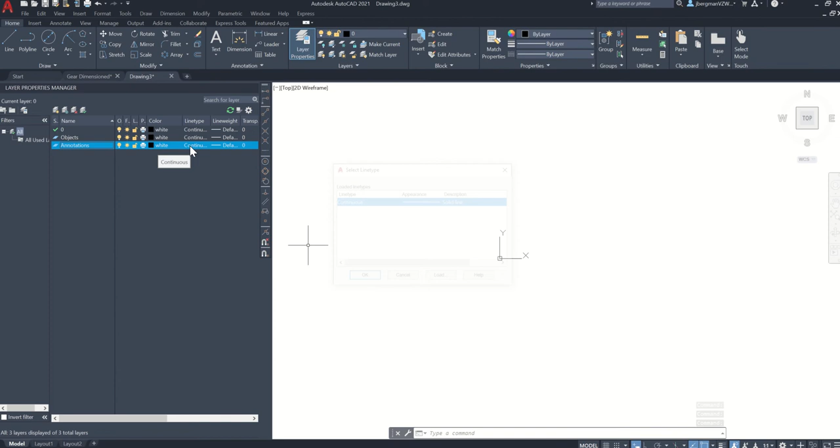And for this layer, we're going to change our line type. So click continuous under line type. And when you add a new layer, or a new line type in your layer, you have to click load. Then we're going to scroll down and find center. Click OK. Then click center and click OK. Now this is your center line type. If it's not showing up in here as center and it says continuous, just click it again and make sure center is selected and click OK.

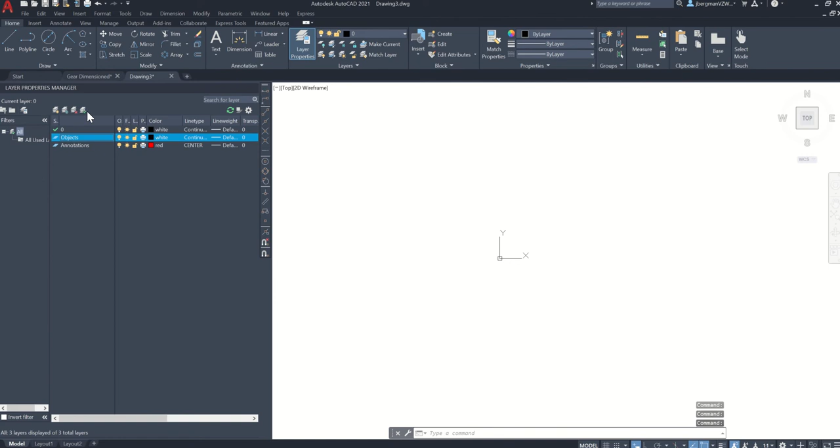All right, and then for our annotations layer, we're going to change this to a red color. And then we're going to click the objects layer and click check to make it our current layer. And then we can exit out of our layer properties.

All right, let me just make sure my units are the right precision. Okay, so another way to change your layer, you can just click this drop down and click objects.

And it's important to note, so I have this Defpoints layer because I have these dimensions in here, and when you create your first dimension, this Defpoints layer will show up. On your drawing, you're not going to have the Defpoints layer because you're not going to add dimensions yet, and that's okay. So you should just have layer 0, which is the default layer. You can't delete that layer. You're going to have annotations, and then you're going to have objects layer.

I'm going to select objects to make it my current layer. So the first thing I'm going to do is draw the outside of this part right here, or this gear right here.

So what I'm going to do is click this drop down and change it to annotations layer, and I'm going to click line. My first point is going to be 0,0, enter. And then I'm just going to draw a line. The length doesn't matter right now, just I'm going to make mine 5 and then tab, and this is going to be 30 degrees. Escape. So I want this to be a solid line here, not the center line type.

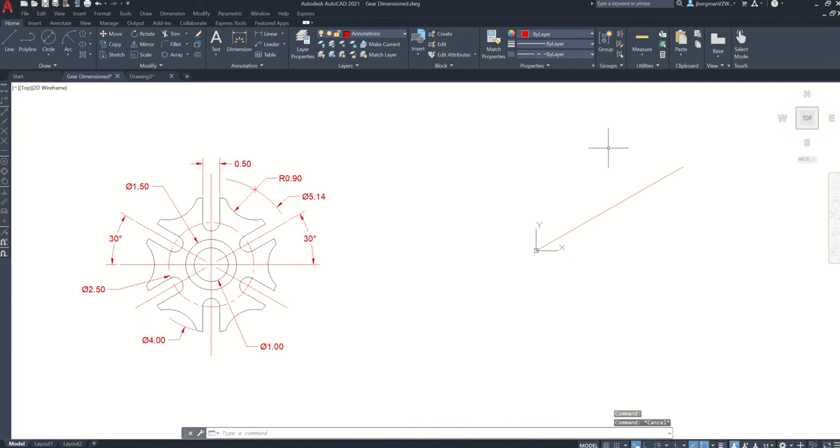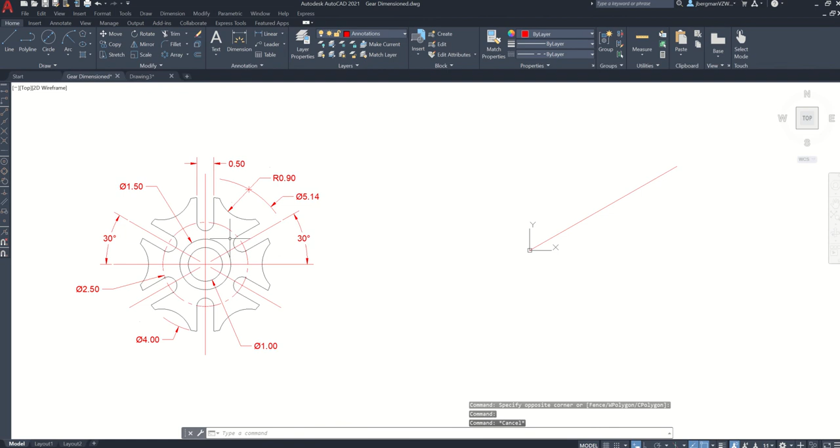And then I am going to, let's see here, start drawing this portion right here. So you can see that this circle right here and this line, okay let's see here, I'm going to draw this circle because you can see that it is the center point of this arc right there. So I'm going to end up drawing this arc first using this circle and this line.

So I'm going to do the center diameter circle. You can see that the diameter is 2.5 over here. Start in the center and then 2.5, enter. Okay, and now from here we can see the center point of this arc.

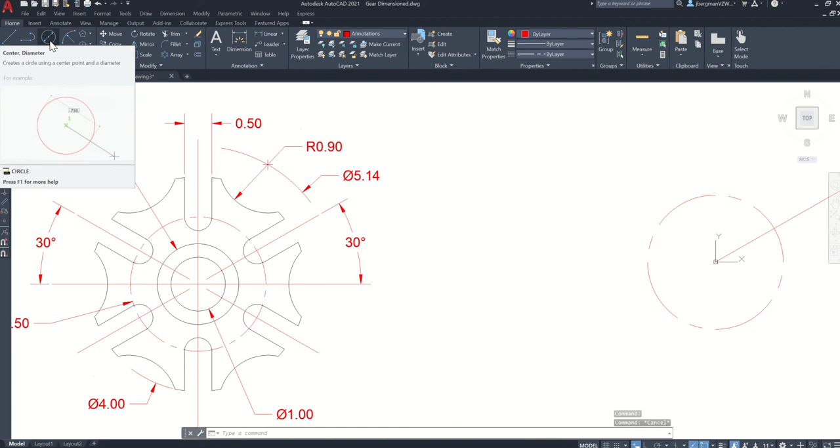Now we know the center point of this arc, but we need to know the radius or diameter. We can see that the diameter of the circle is 0.5. So we're going to use the center diameter command, click that point right there, and type in 0.5, enter.

I'm going to click on this object and change the layer to the objects layer, then hit escape to deselect. This one will still remain on the annotations layer, so just click this and change it to the objects layer, so everything else newly drawn will be in the objects layer now.

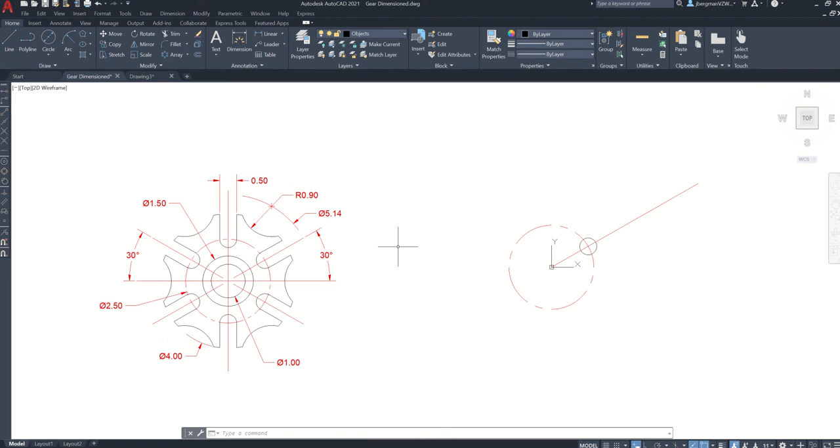We can see that from this line to this line is 0.5. So what I can do is use this line and offset by 0.25, because this whole thing is 0.5, and from here to here is 0.25 since this is in the center. I'm going to click offset, type 0.25, enter, click this line and click over here to set it, then click the center line and click over here to set, then escape to end the command.

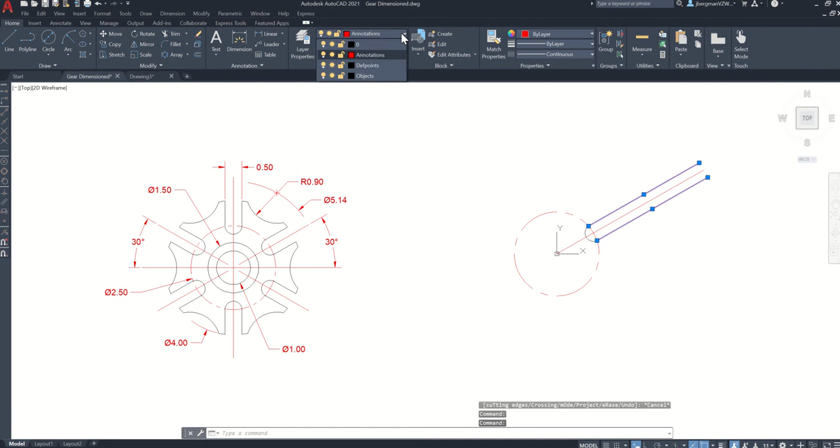Then I'm going to hit the trim command, and trim this and this, and also trim this portion here or this portion here that we don't need. I'm going to click on these two lines and change them to the objects layer, escape.

So we have that portion right here, and now we can start drawing this right here, or we can draw this arc here. If we go around to find the dimension, you can see this diameter 4 dimension, which just means that all of these are just a trimmed circle with a diameter of 4. So let's just draw that.

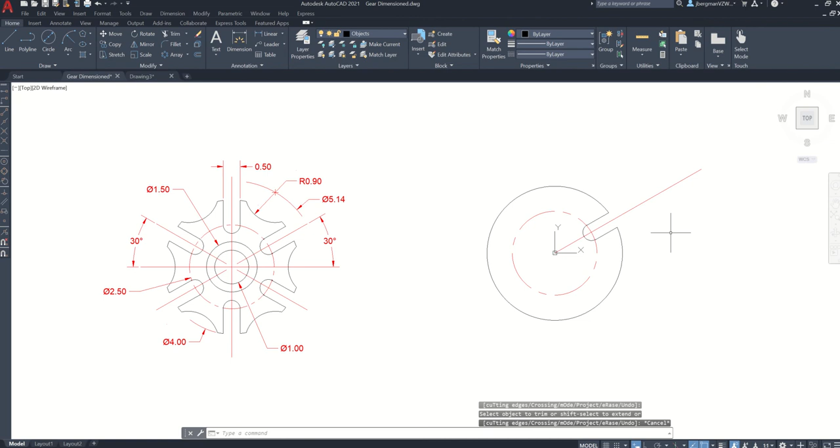I'll do a diameter circle from the center, diameter of 4, enter. Okay, then I'll go to my trim command and trim this slot here. Now that's trimmed, and we'll start drawing this portion there.

When drawing this, you can see our dimension for that portion is here. We can see it has a radius of 0.9, and our center point is right here. Here is the center point, it lays on this circle here.

That's a diameter of 5.14, and using common sense, since 5.14 is bigger than this diameter of 4, we can assume the center point shares the same center point as everything else in this drawing besides this arc. So we're going to change our layer to annotations so we don't get confused, and do a center diameter circle, starting at the center point with a diameter of 5.14, enter.

Okay, and that's going to be this outside one. Then the center point is just going to be the midpoint of, let's see here, the center point is going to lay along this arc here.

So why don't we go in here and draw lines. I'm going to draw one just to the right, turn my ortho mode on, and draw a reference line over here to the right, then draw another reference line from the center up.

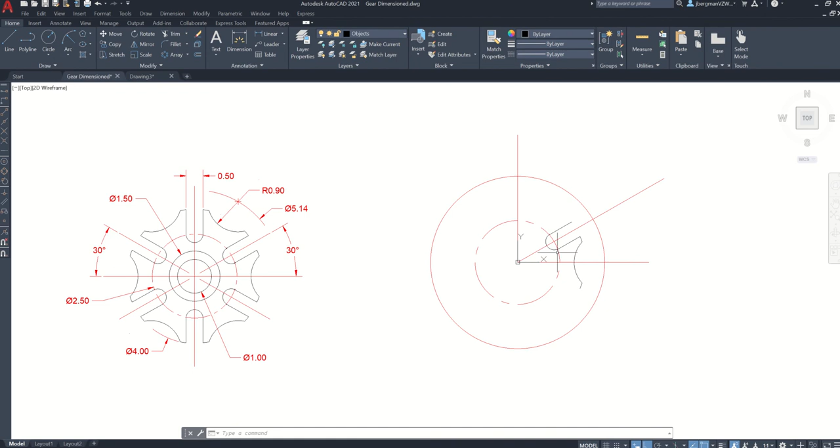All right, awesome. So now I'm going to use a polar array. You can actually go in and add this part as well, mirror it. How you do this is up to you, but I'm just going to do it this way.

So the next step is to add a polar array. And when I zoomed into this vent here, I noticed I didn't finish trimming. So let me just trim this first. Click trim, trim there, and trim there. Okay, escape.

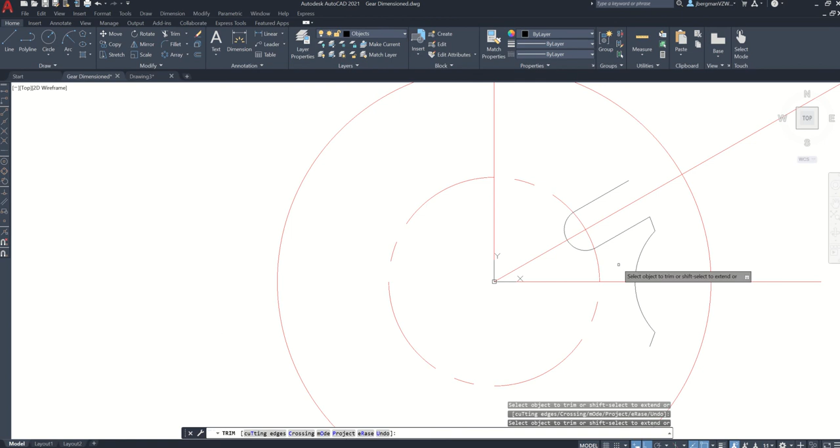So again, we're going to use polar array. Instead, rectangular array allows us to array in rows and columns, and the polar array allows us to array these objects in a circle here. So if you click the down arrow, last time we used rectangular array, this time we're going to use polar array. So click polar array, select objects.

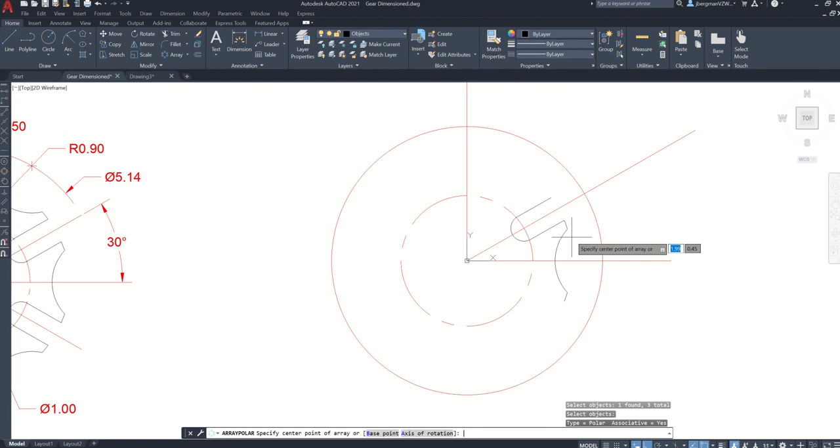We're going to select these 3 objects first just to see how it works, and hit enter. Then you specify the center point of the array, so click the center, and your array manager will pop up, and the number of items that we want is 1, 2, 3, 4, 5, 6. So we want 6 items. You specify here, if I put 8 there, it will still look the same, but we're going to type in 6, okay, because that's how many you want, and then click close array.

So we have that, and you can see once you click on one, all of them will be selected. So we can explode after we do our second array.

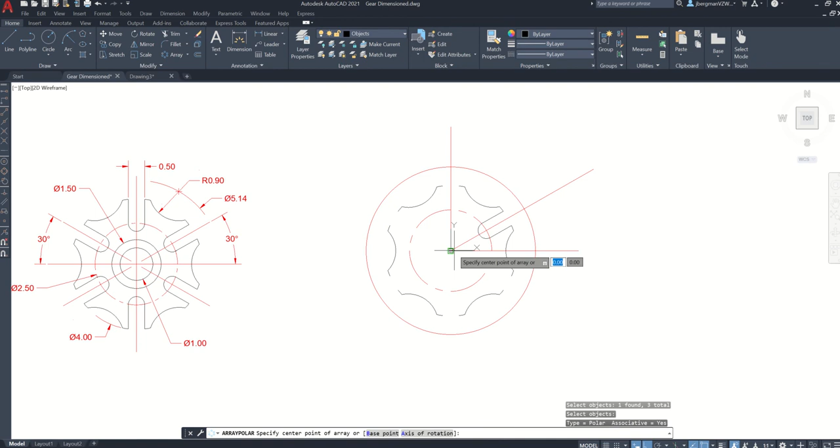So for the second array, you're going to click polar array and select this time these objects. And hit enter. The center point is going to be the same center point, and we want the same number as before, and you can see it finishes the outside gear. Click close array, and we are good to go there.

So I'm going to click this circle and click delete because I'm not going to need it anymore. All right, so now that we have this outer portion, we just have to add these center circles here.

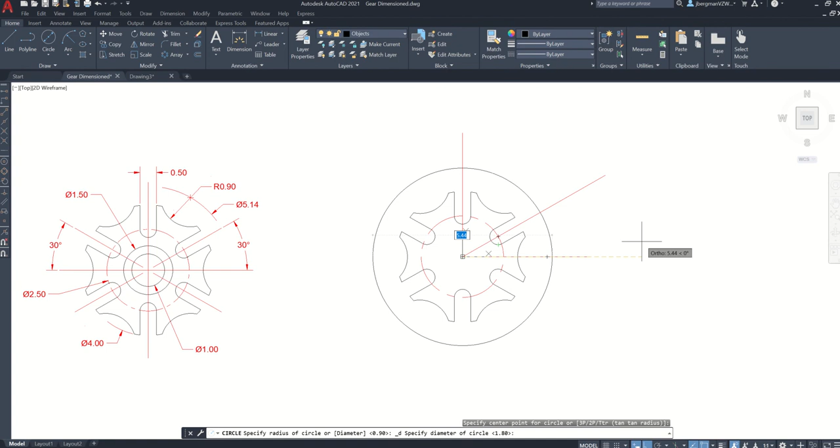So make sure you're in the objects layer. They are both center, or we're given diameters, so I'm going to do a center diameter circle. The center point is going to be 0, 0. Click there, and the first radius or diameter is 1. Enter. And then click the circle command again, click 0, 0, and the second diameter is 1.5, enter.

And so now you have the gear shape right there, okay?

And if you want to add the rest of these lines, you can just use the mirror command. So we'll mirror this one, enter, click the center, make sure ortho mode is on, no. And then we'll do that again for this line, mirror, let's click the center point and to the right here, no. Okay, and you have both of those, and you can do the same thing for these right here.

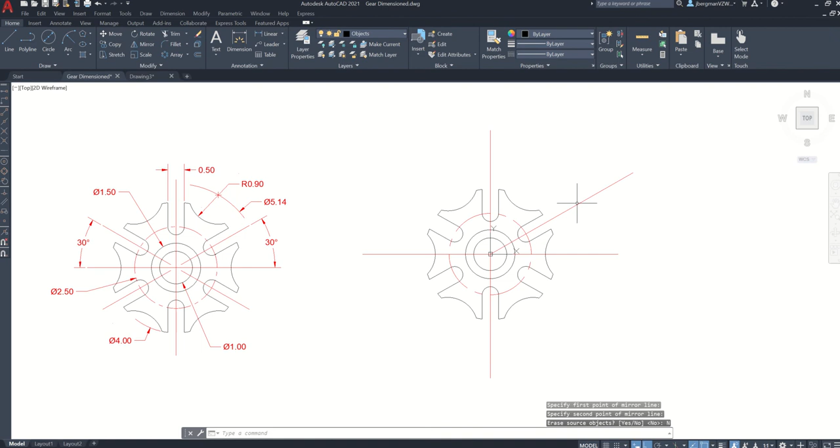Just make sure to follow the instructions. I'm just going to delete this angled line for now, but depending on what your lab says, make sure to add all the red lines that the lab asks you for. And that is all for the gear here.